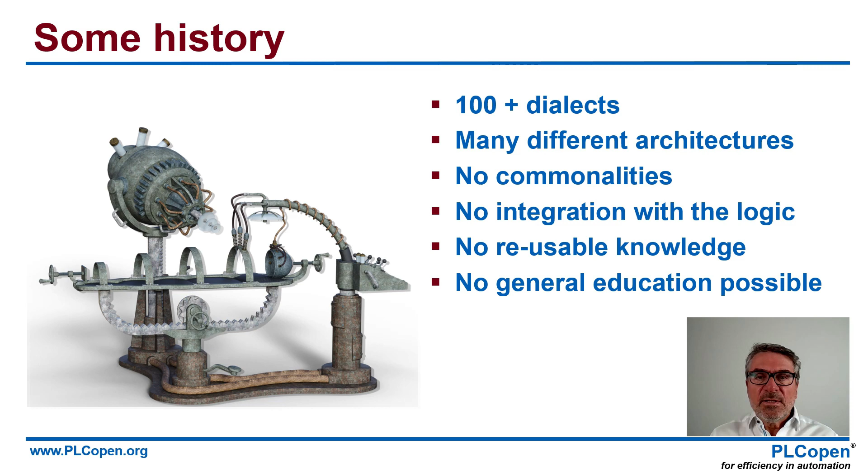First, let us go a little bit back in history. Not so long ago, there were well over 100 motion control dialects. And that means there were not many commonalities between them, and everybody spoke a different language. So it was very difficult to learn and generically understand each other. Even logic was a completely different language. So it was very difficult to communicate and to integrate those.

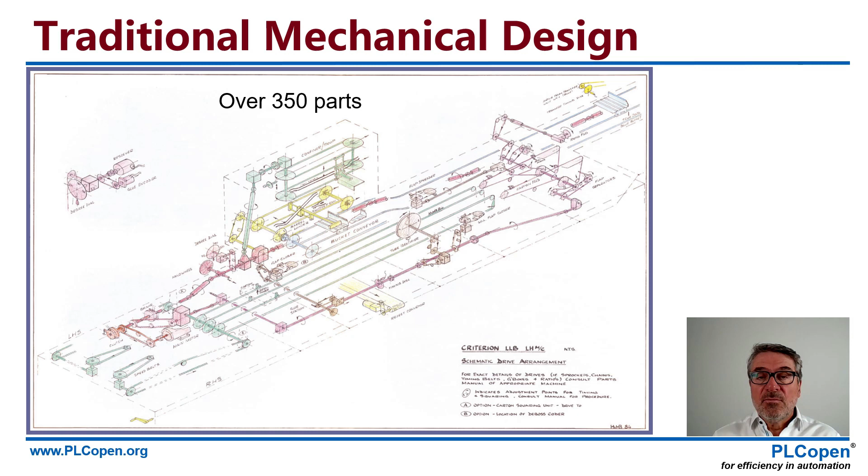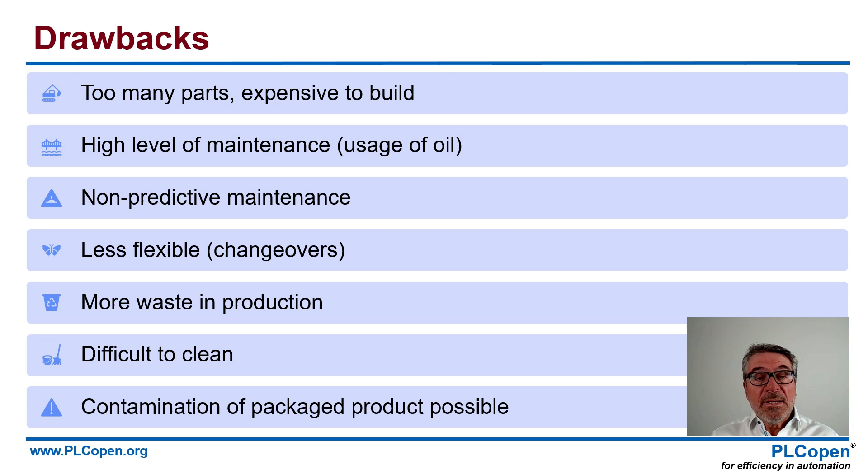If you look to a classical mechanical design, there was only one motor, and the rest of the functionalities were coupled via mechanical links, via gears, via belts, via all kinds of constructions. And that came with a lot of problems. You had too many parts, it was expensive to build, you had a high level of maintenance, you needed oil that could be encapsulated in your packaged products, so it could contaminate them. Overall, you also had more waste in these lines, so we had to find new ways.

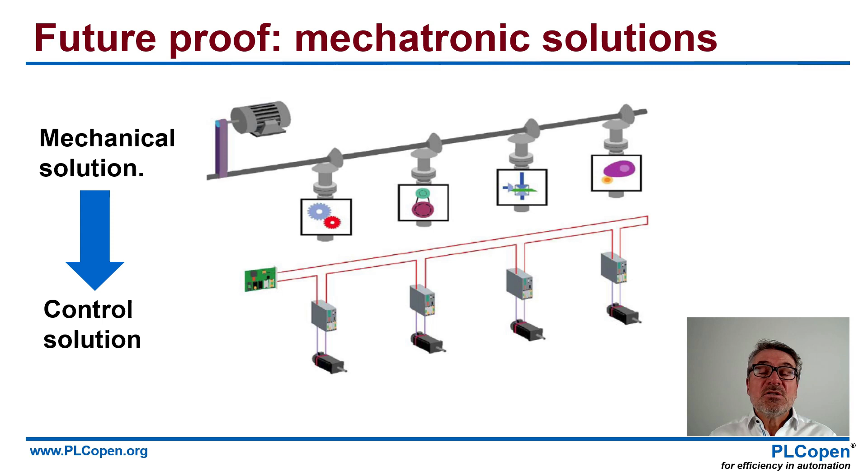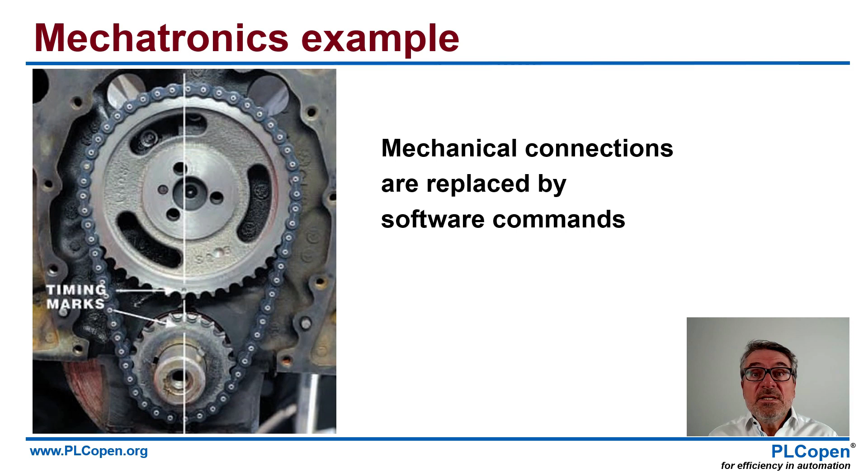And the new way was to go from this mechanical solution to what we call a mechatronic solution: the combination of mechanics, electronics, and on top of that, software. So if you look to these belts and these chains, and you had a certain timing problem like you have in the engine in your car, then you know that this is not the right way. We want to move these functionalities to a software solution, to software commands.

And that means if we take the same mechanical design, which was a packaging machine, and we look to all the functionalities that are there and put a servo technology there, then you see that we have a completely different design. So we take out the pulleys, the belts, the drive sprockets, the spline shafts. We take most of the gearboxes out, but of course we add motors. The big motor is gone and we replace it with smaller motors local to the functionality where they are needed. And overall, as you see, that leads already to an 81% reduction of components. So that's a good starting point.

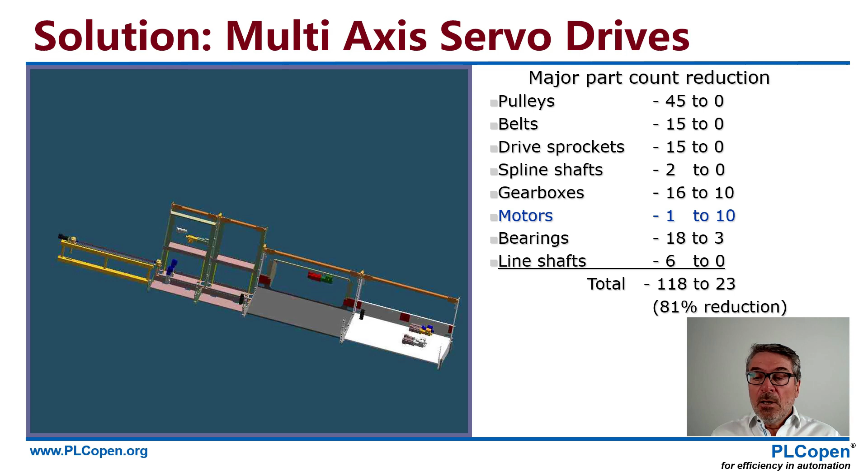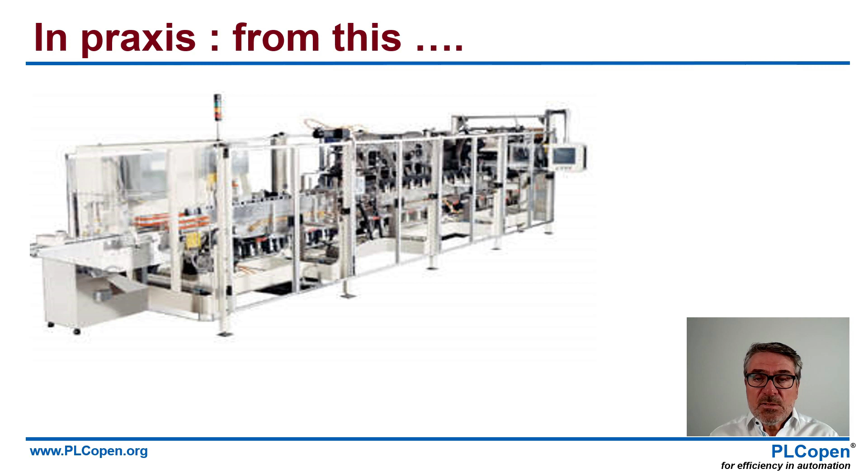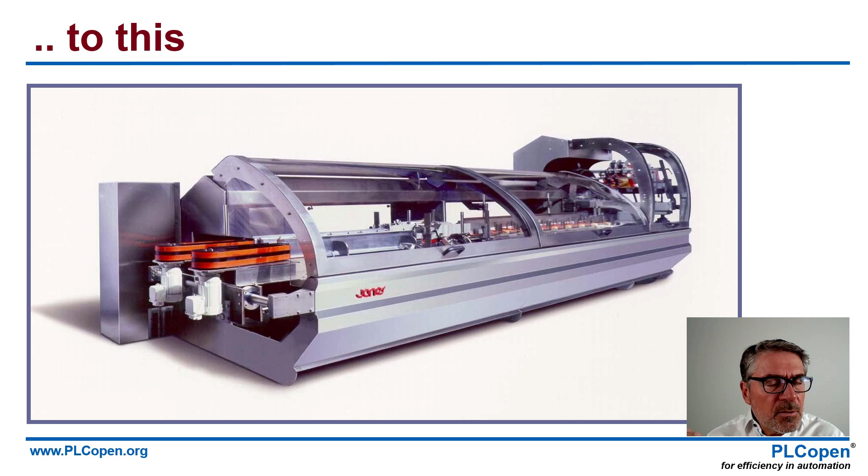And in practice, the packaging machine was converted with these concepts from something like this, which needed oil and a lot of maintenance, to something like this, where if you open up the bottom part, there is no master axis there. There are no mechanical links there. So it's much easier to work with. Overall, we call this faster, better, cheaper. Something that all industries need, not just industrial automation.

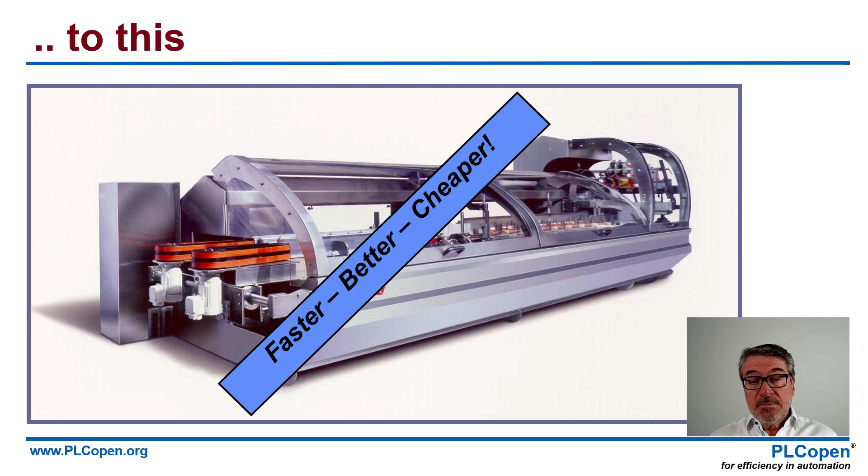So PLCopen is supporting this transition because we see, of course, the controller needs software. And the software needs reusability via abstraction. I'll show you what I mean with that. Software needs standards, and that's where the role of PLCopen came in.

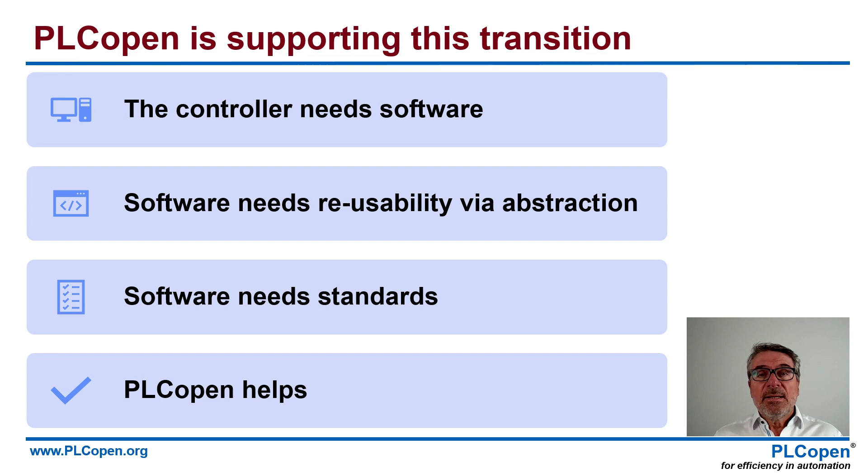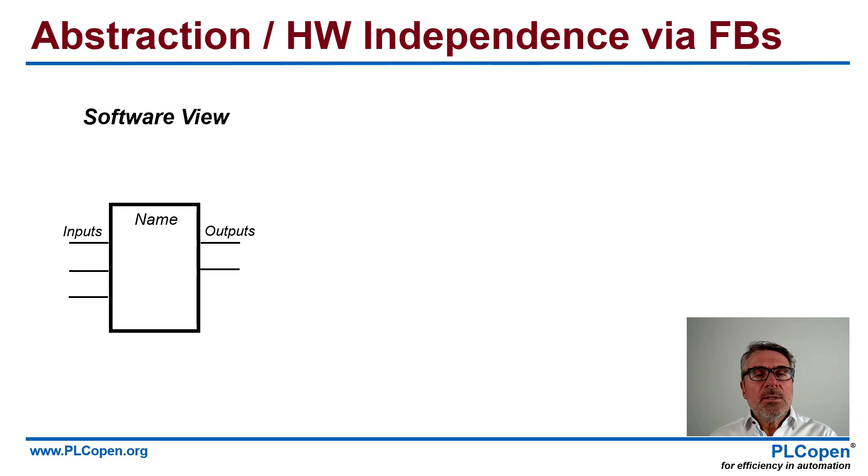So first, something on this abstraction. Here you see a function block. It has a name, inputs on the left side, outputs on the right side, and this is the graphical representation. We can do a textual representation too, but this is easier to show. Internally, in the hardware view, this function block contains code, and the code will use the interface, perhaps the network, to connect to an intelligent drive, to a motor and to an encoder and get this up and running. It can be a network, or it can be built with pulse width modulation, with a direct connection to the power stages of the drive.

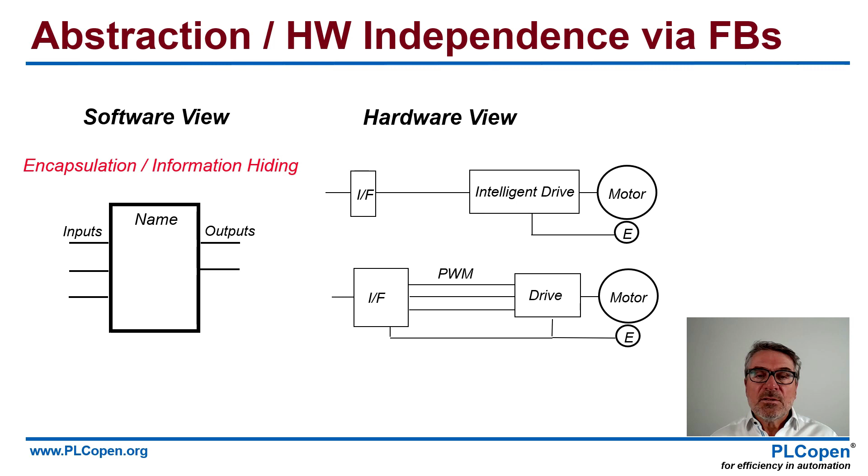But from a software point of view, as you see on the left, it's the same look and feel. That's what we call encapsulation, information hiding. That's what we call abstraction. You do not see the details on that level. I can start moving the motor and I do not have the details about how that is connected. So here you see a real function block, Move Absolute.

On the left side you see again the inputs. On the right side you see the outputs. They're all linked to the data types. So you see a link to the axis, and then you see the execute, and then you see some profile information, position, where do we want to go, the move absolute position we want to move the axis to, and then a certain profile, velocity, acceleration, deceleration, and jerk. And on the outside you see when it is done or when it is busy, and if it's not done correctly

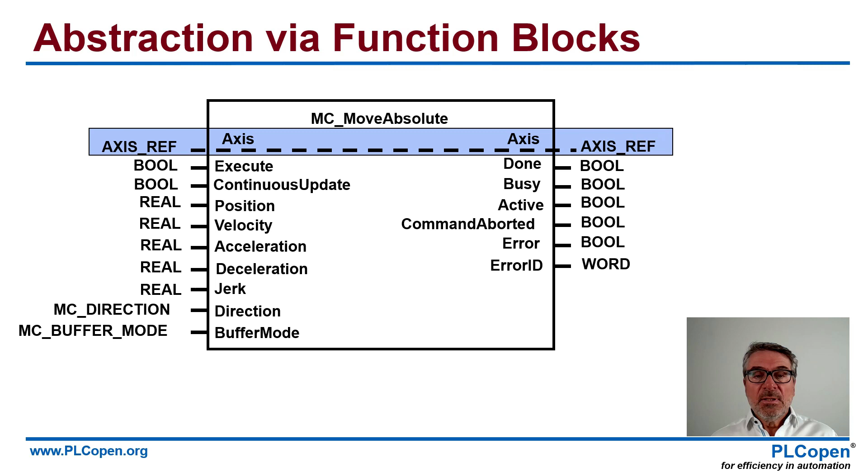with error ID. Now on the top you see that the axis ref, the reference to the axis, is a little bit different than just an input and an output. It goes right through. That's what we call an in-out variable. It's both an input and an output. And the nice thing of that one is that the reference is outside of the function block. So we really reference to a structure that is outside of the function block.

What you see in practice is that you have this function block, and there the axis ref, the structure is outside, so the real reference to the axis. And that's via some kind of conversion to this interface, to this drive, to the motor. The encoder information gets back. And that's what you want every millisecond, every 500 microseconds, or whatever time. Or you can even do it event driven if you want.

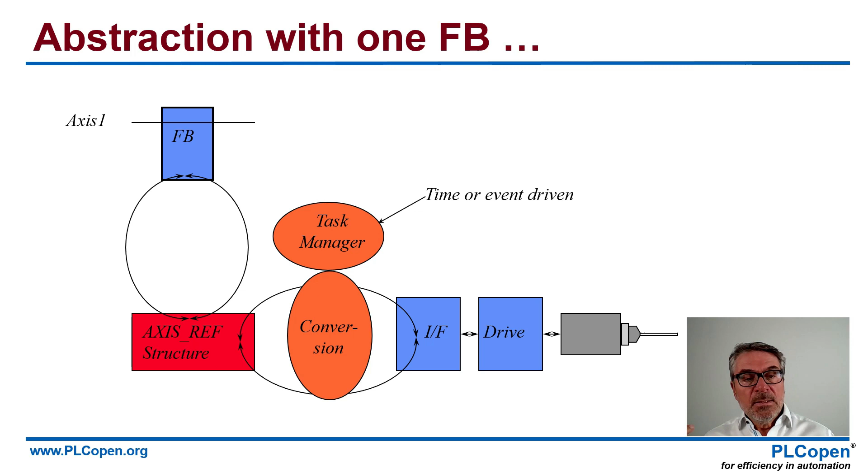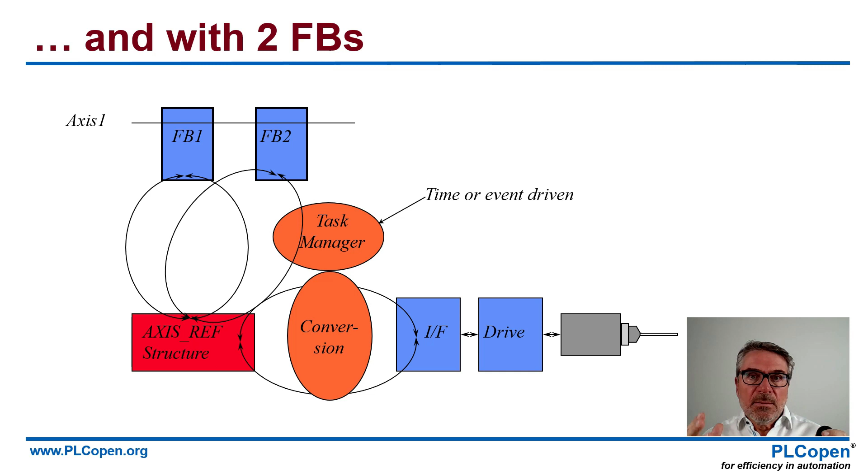Now the nice thing is, if I have a second function block that operates on the same axis, it operates on the same axis ref structure. And that means that I can link these function blocks, and if the first one is done, the second one I can start with the execute. So this is very easy. And you see the abstraction. I do not know the details about the basics, about the network, about the motor, but still I can make that operational. Every function block has the same error handling procedure, error ID.

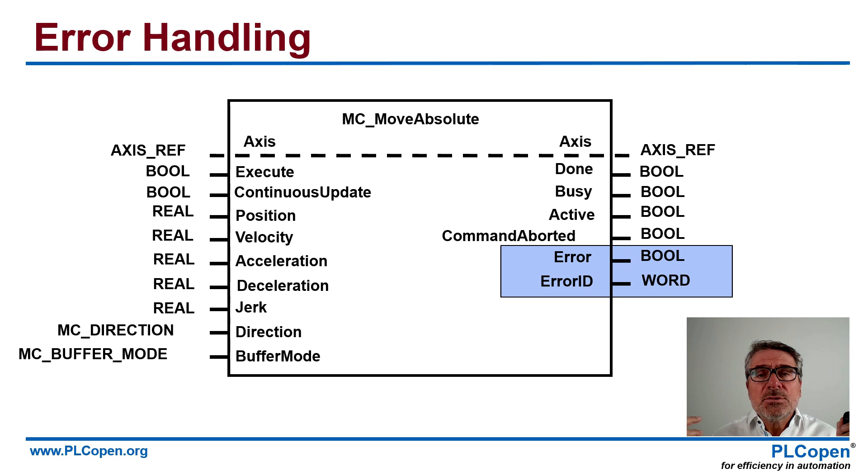The error tells you if there's an error, and the error ID tells you a number, which is related to the information there. Why do we use a number? Because with a table you can easily convert a number to a string or to something that is useful to you. And even in different languages. Not only English, it can be Japanese, Chinese, or whatever language you choose. And converting a number via a table is much easier from a language perspective.

So on this basic idea, PLCopen developed a whole suite of specifications. Part 1 is the basics, the function blocks for motion control. That's where the whole concept is now. Part 2 is the defined extensions. This is more historical. It's now integrated in part 1. So parts 1 and 2 are merged. Part 3 deals with user guidelines, and that helps you to understand how you can use this. Part 4 is coordinated motion. Think robotics. I will show you later what we mean with that one and what we have done there.

Part 5 is the homing procedures. How do I home my whole machine? Also there, I will show later what is in there. Part 6 is fluid power, some extensions dedicated to fluid power. And I will show you that set too.

What is important is that overall this is supported by around 30 companies and around 67 products. Of course, more companies are coming in and being added. So check the website, plcopen.org, for an up-to-date list. But the important thing is that you have a huge richness of choice. 30 companies delivering all kinds of products that help you to fulfill your needs.

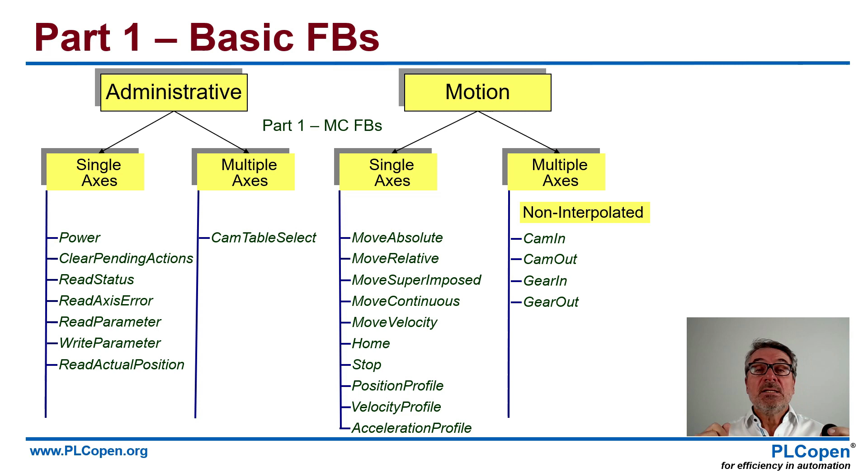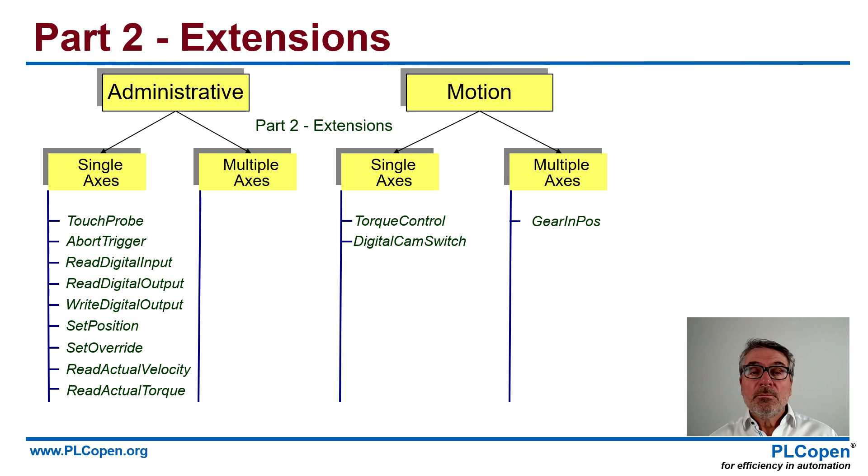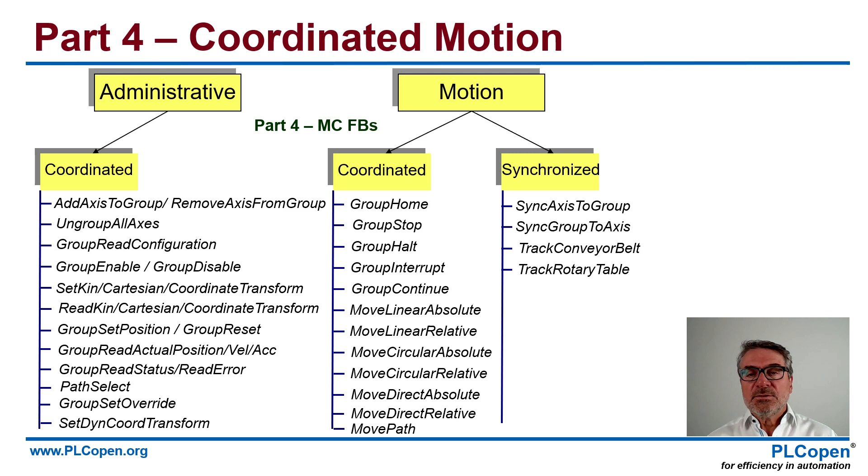And then you start moving, and the synchronization is that you synchronize the robot to something else, or something else to the robot, a single axis. I will show you some examples.

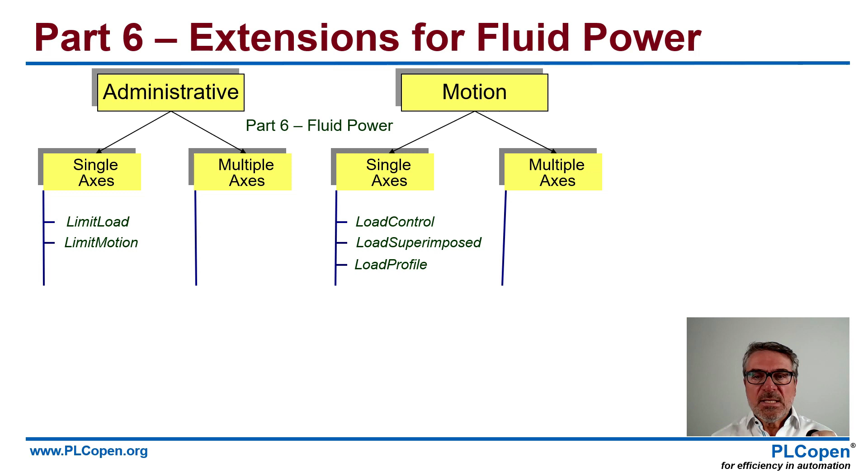Part 6, the extension for fluid power, adds some specifics for the fluid power. And that means those are more load related function blocks. Think if you have a hydraulic shovel and you're on a curved area of land and you try to move it around very quickly with the arm, you probably can fall over. So the control can limit the maximum velocity, to make sure that you are safe within your shovel.

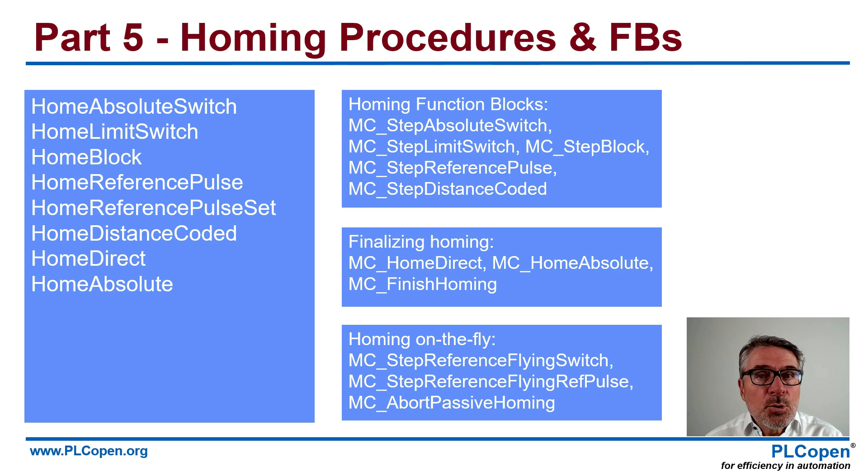And that reference point, think about an AGV where your tires can be a little bit less when you have weight on it. So it can be that you measure it a little bit differently. Now if you have reference points, it's very easy to correct your homing position. You know again where you are.

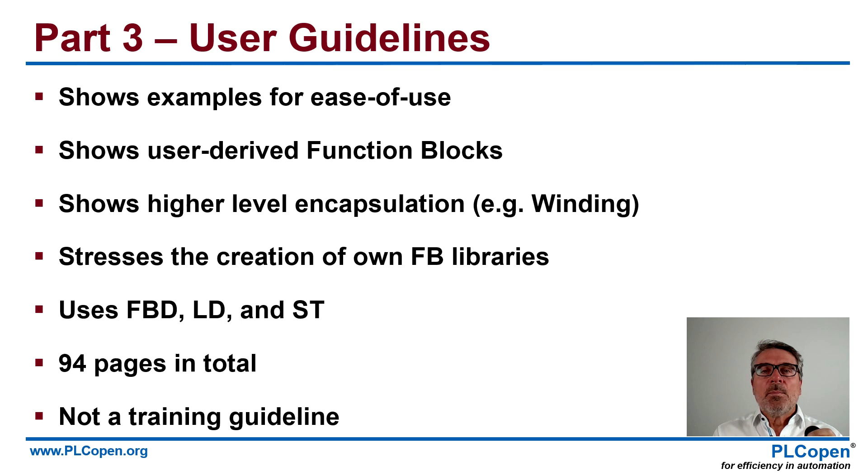And it's around 94 pages. So it's really content, what I would like to say. But it's not a training guide. If you use a specific environment, the supplier will give you the right training material.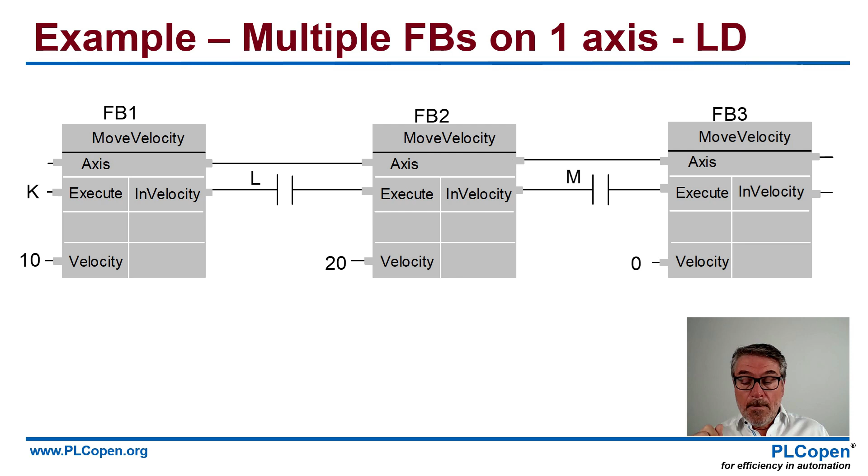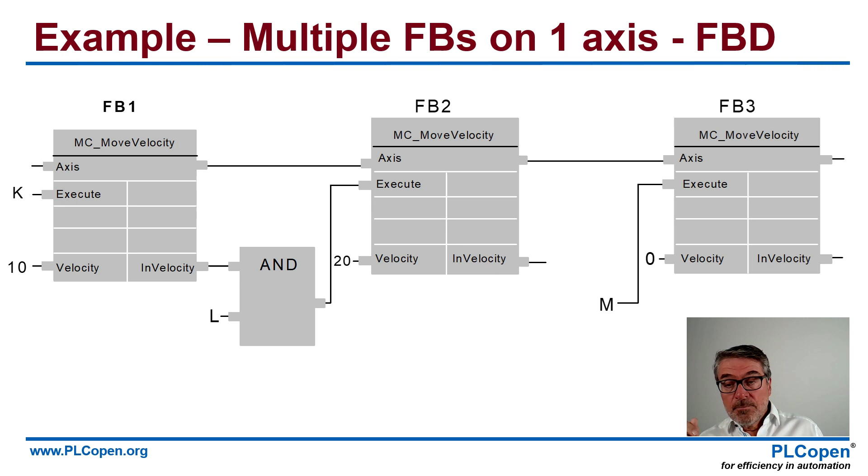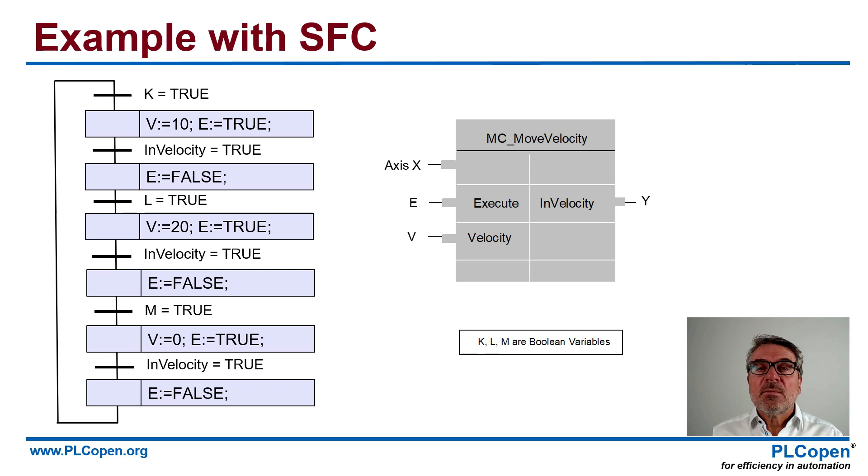This is the same example in function block diagram, but you see the same K, L, M that trigger the velocity 10, 20, 0. I even can do this in sequential function chart, where I have the several steps, and I go in the first one. You see velocity 10, and then velocity 20, and near the bottom you see velocity 0. So that's what we move. We do have one instance of the function block move velocity, and we feed it different values.

Also specified is the combination of axes in part 1. So this is a GearIn. You see a master axis and a slave axis, and you want a certain ratio between the master and slave. And when the execute is done, you want to fix that ratio, and then you see on the other side when it's in gear, when this is done. And of course the error outputs are there.

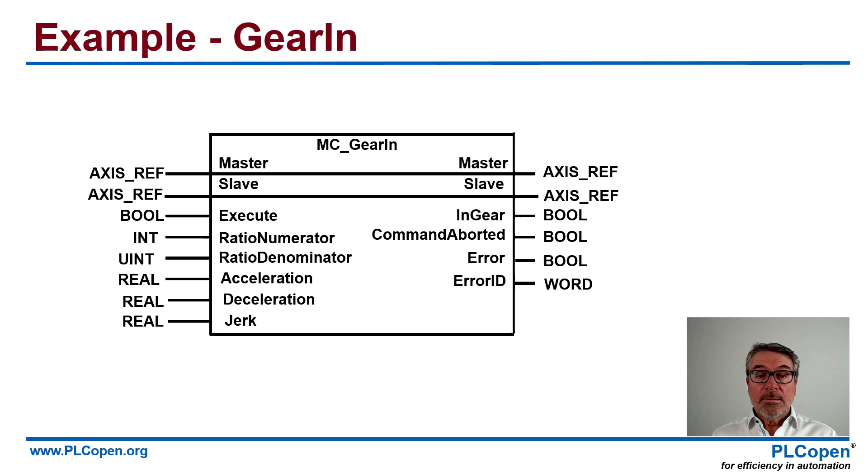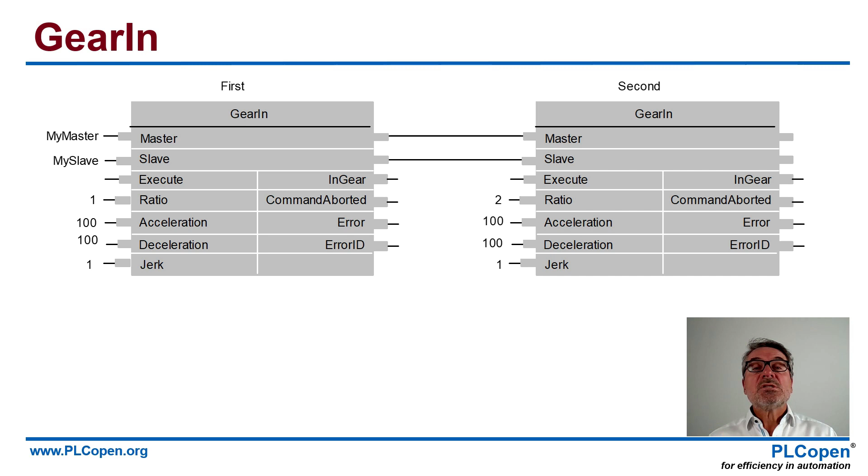If I look to two of these function blocks, I connect them to my master, I connect them to my slave, and I do a ratio 1 in the first function block, and I do a ratio 2 in the second function block, with a certain maximum acceleration and deceleration. Then when I execute the first function block, it will move to a ratio 1 between the master and the slave, and it will set in gear when that is reached. And if I execute then on the same axis, of course, the second function block, it will switch over to a ratio 2 with a certain acceleration profile.

So that's what you see here in your timing diagram on the left. Execute first, the first in gear. It takes some time before the ratio is reached, and you see on the bottom the slave velocity increases from 0 to what the master is. And then with the second execute, it increases its velocity compared to the master with a ratio of 2. So you switch gears, but just in software and not the way that we do it manually in a manual gearbox.

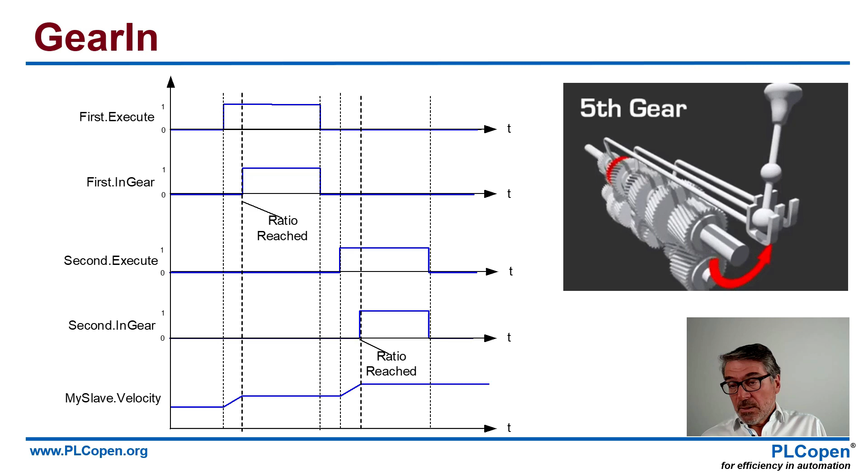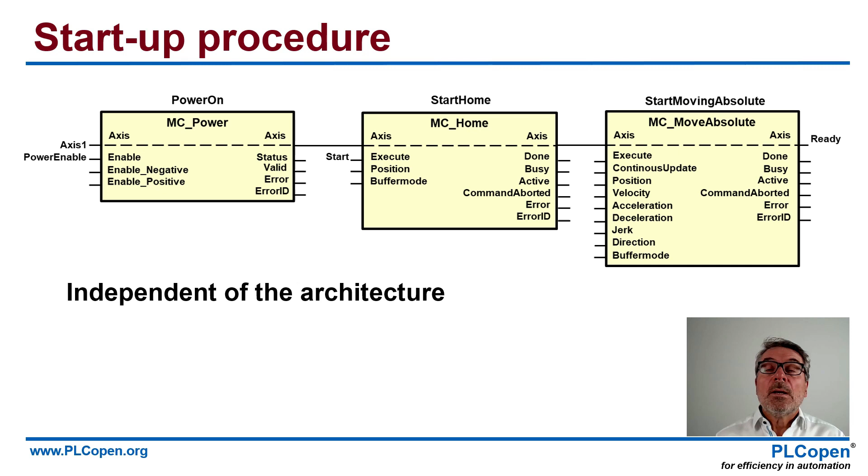A startup procedure: that's if I have connected just a motor and a drive and encoder, and I want to see if I've done that correctly, so I want to create a small program that starts moving my axis. This is what you do. You do a power on, you do a home, and you do a move absolute. And then you know it's moving in the right direction, and if you've done that correctly. And this is independent of the architecture. So it's not very complex in that sense. And the information hiding that I showed you, the encapsulation of the functionality, helps you tremendously here to get your startup procedure and to check if you wired it all correctly.

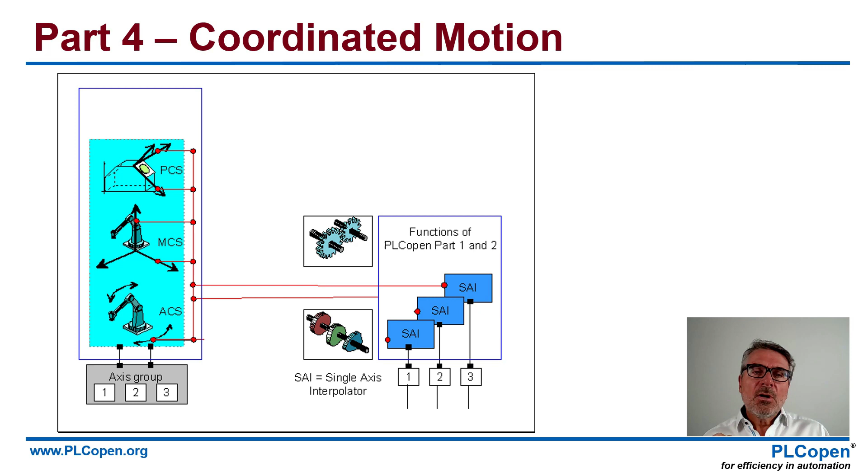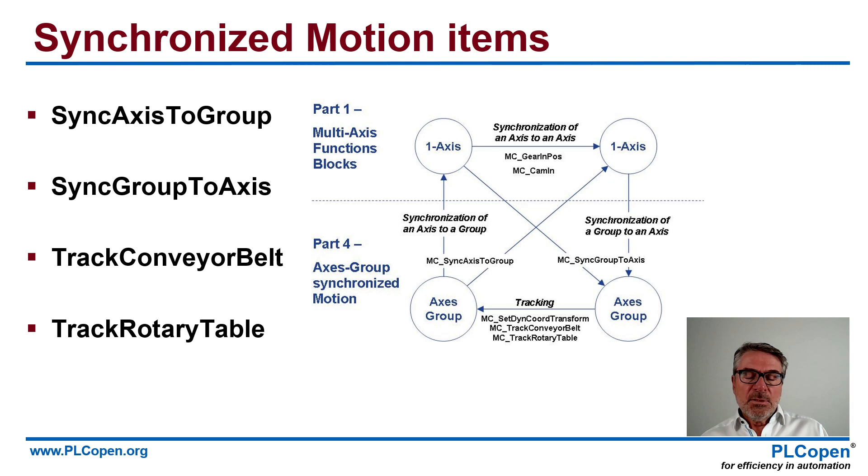And then we have these synchronized motion items, where we say we have this group of axes and we want to link that in a relationship to a single axis. So I can do an axis to the group or a group to the axis. And we got two other functionalities there. Track conveyor belt, so that's a conveyor belt that's running, and on top of that one, I want to make sure that my robot arm, or what's there, follows that one. And the rotary table. I'll show you some examples there.

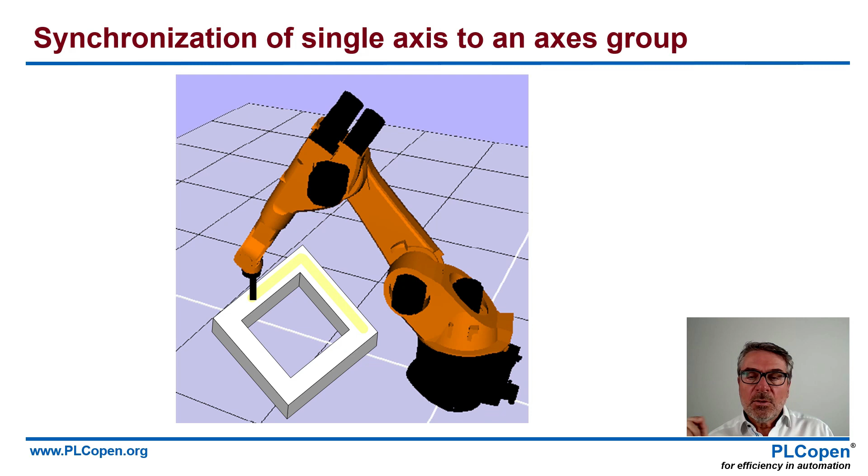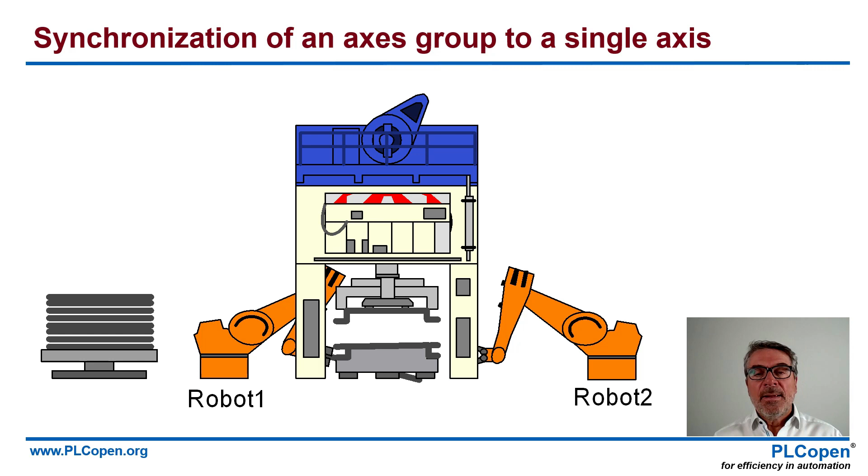If I want to put glue on a window, which will be stuck to your car, I synchronize a single axis, the one with the tube of the glue, to the axis group, and that's the end effector in this case, what's important of the robot. I can do it the other way around. I got a press, and when the press is moving, I want to know where it is in its phase, because then I know when it's open and it's safe to put a plate in or a plate out in this press. So the press can go on and on, and the robots just go in and out because they know where they are and how to synchronize to them.

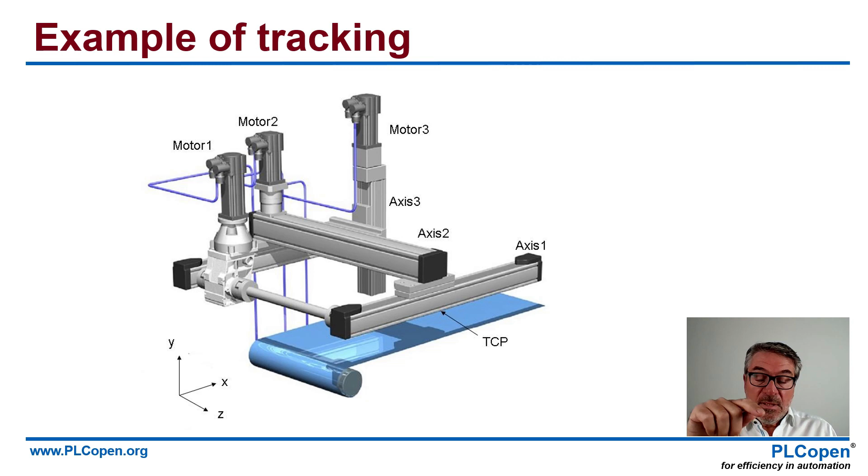And tracking: now here I got the conveyor belt on the bottom. And imagine that there's a cake on it and I want to write your name on it with some cream. So I want to synchronize the movement of the cake versus the name that would be written on it. So then I do a tracking to the belt.

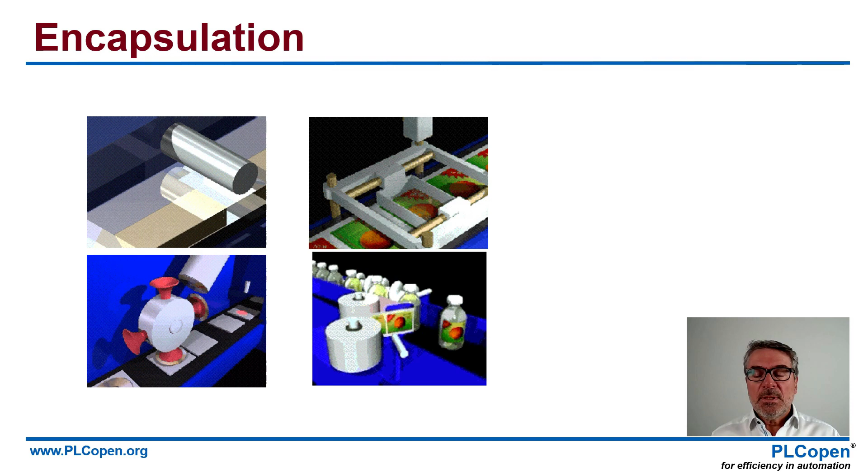I showed you encapsulation. I will go to a next level there and show you even more how you can use it to create your own function block libraries. And for that one, I will show you the winding, unwinding. So I got a large roll of paper and I either wind it up in making it or unwind it if I want to use it by wrapping any product there, packaging. Think about a chocolate bar.

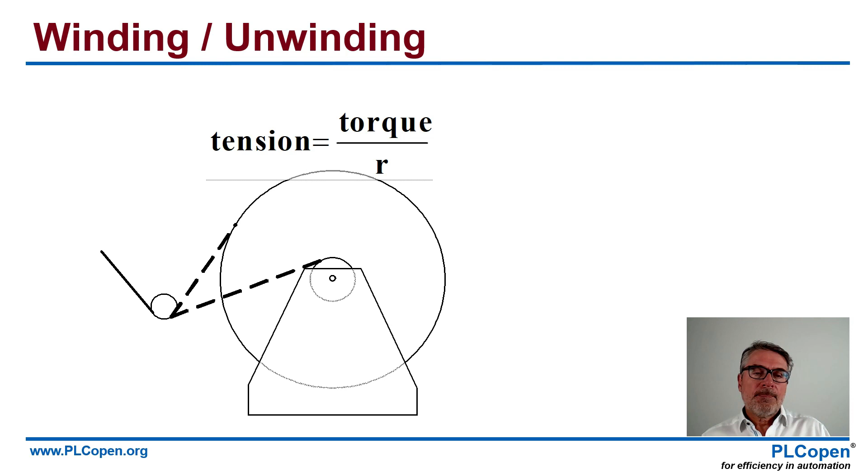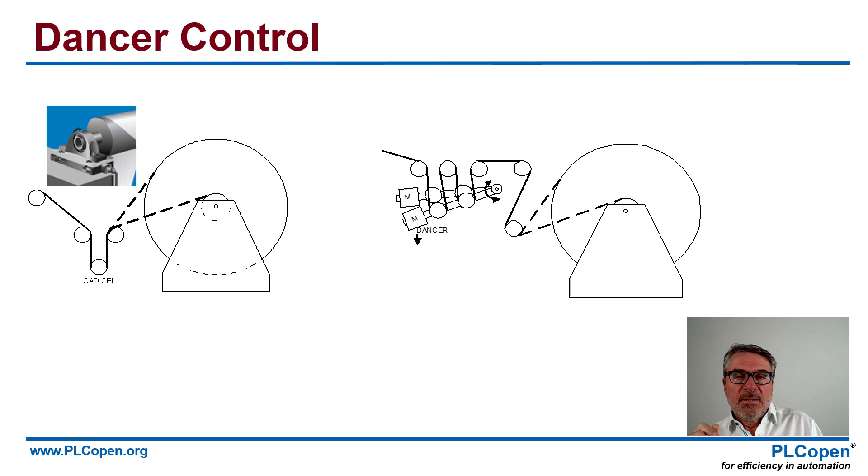So in order to have a good control, a good force on the rolling process, or the winding or the unwinding process, there are several ways of doing that. We call that in principle dancer control, that you have a consistent tension on your paper in that sense. And when I've decided how my dancer control looks, it's relatively easy to create a winding function block with a constant surface velocity. I got my axis ref. I got only one axis, that's the one that's turning it in.

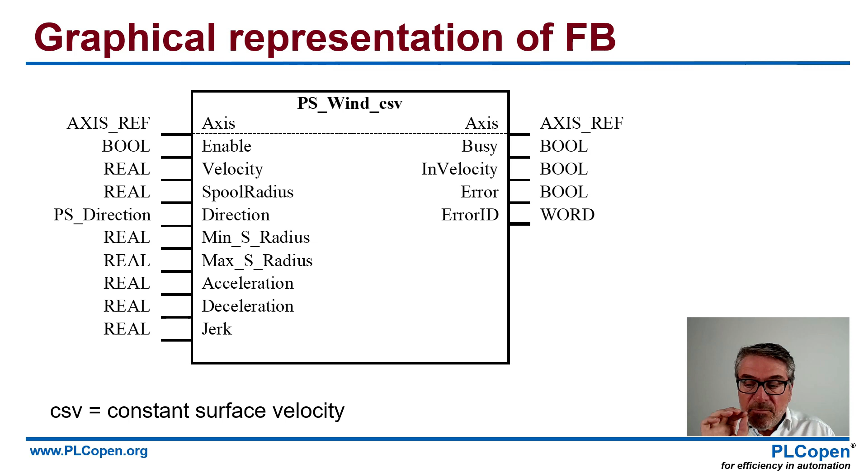And I got a spool radius, a minimum radius, maximum radius, and some profile there, and the velocity that I want to do that. Internally, if I double click on that function block, it would open. I can see some code in it. And this is the code. I do a move velocity and a stop, and the velocity is related to the radius because I want a constant surface velocity. So the amount of paper with every turn of it, if it's nearly empty or nearly full, it's still the same.

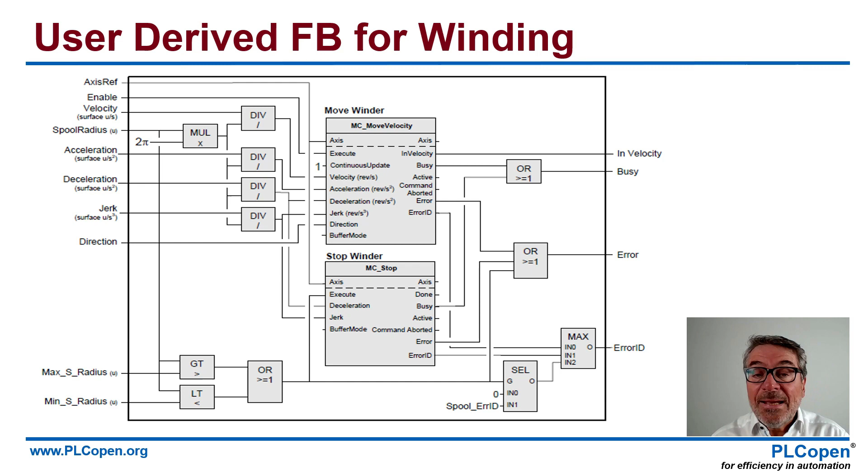So that's where the relation is, and that's where a certain calculation is done, the divisions, and make sure that I get the right values out of there. So I encapsulate this and create the function block out of it that I had there. And with that one, I go from the basic function block as defined. Here's on the bottom your PLCopen Motion Control function block, but also the logic and the safety and the communication. And I create function blocks which suit my application area.

So I create my own library of function blocks with a higher level of functionalities, much closer to the problems that you want to solve in practice. And there can be several layers on that one. And for packaging, you can go to a level where you see these cutting, sealing, filling, capping, higher level functionalities that match the application areas that you want to fulfill there. And your application program in that case gets very small, very tiny, because it calls just the function block instances that are under there, and it gives them the right parameters. And the functionality is running there, so that's not part of your application program. That's part of your function block libraries.

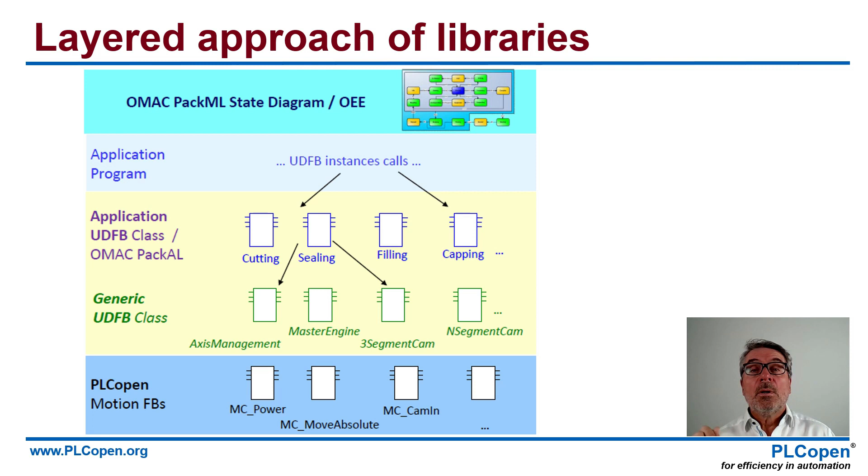And we always advise to put a state machine on top of this hierarchy. And in this case, the example is an OMAC PackML state machine. And it gives you a consistent look and feel of your machines or your devices or of your production line at whatever level you are. So PLCopen Motion Control provides a suite of specifications that results in a suite of implementations, 30 companies, 67 products, a suite of suppliers, a fast-growing suite of users, and I hope we will grow there still. And that means we hope we give you a suite of advantages in that sense.

Now, motion control is not the only part that PLCopen does. What PLCopen basically does is we combine the logic, motion and safety into one environment, giving you structuring, decomposition, reuse, and in the end less training. Think about 100 dialects, there's only one now left, and that's easier for your training. Even if you use different systems, the look and feel is consistent across those. On top of that, we add communication via OPC UA, XML for exchange of programs, of projects, and of course training where we set guidance on how to improve the quality of your software development process.

And that's our tagline, efficiency in automation, because that's what we want to achieve for you. And I hope you have seen this, that using PLCopen Motion Control can help you to gain more efficiency in your application software development, but also in your maintenance and your installation.